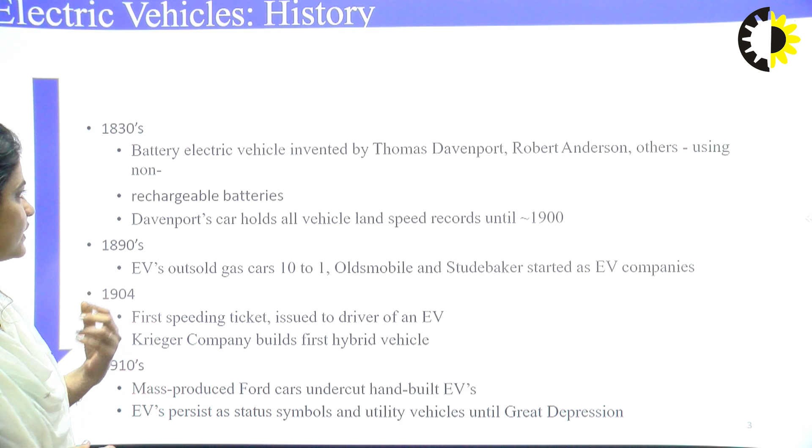So when did it start? Let's see the history of the EV. It started from the 1830s, like battery based electric vehicles invented by Thomas Davenport and Robert Anderson, that used non-rechargeable batteries. That's why it could not cover very large distances, and the technology of charging was not developed during those times. Davenport's car held all vehicle land speed records until 1900.

Then in the 1890s, EVs outsold gas cars, and some more companies also came up and started with electric vehicles.

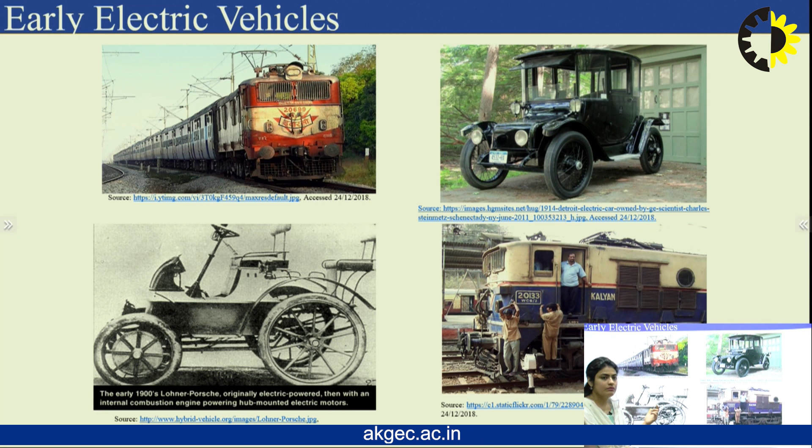So this is the vehicle which is based on the electric vehicle, built around 1914. And this is the first electric vehicle developed in the 1900s.

So looking at the timelines, the electric vehicle is not a new thing, but the demand for it is new.

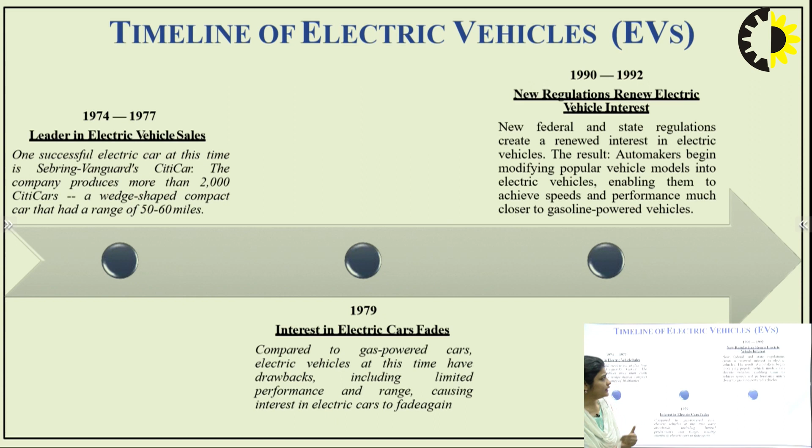Then with new regulations, renewed interest in electric vehicles was created. In 1990 to 1992, new federal and state regulations created renewed interest in electric vehicles. As a result, automakers began modifying popular vehicle models into electric vehicles, enabling them to achieve speeds and performance much closer to IC based or gasoline powered vehicles.

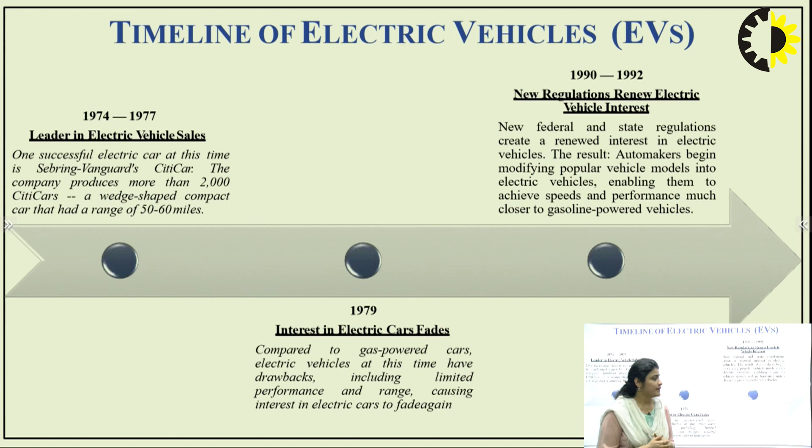Then in 1996, General Motors released the EV1, an electric vehicle that was designed and developed from the ground up, and the EV1 quickly gained a cult following.

Then in 1997, the first mass-produced hybrid vehicle was introduced by Toyota, and in 2000, Toyota released the Prius worldwide, and it became an instant success because it had better performance and speed range.

Then in the 1990s, building a better electric car, behind the scenes scientists and engineers worked to improve electric vehicles and their batteries, because in electric vehicles the battery is the major issue, how to manage this battery. So this is a major issue.

In 2006, Silicon Valley startup Tesla Motors takes on the electric vehicle, producing a luxury electric sports car with a range of 200 miles.

Then between 2013 and 2019, the Energy Department invests in a nationwide charging infrastructure, installing 18,000 residential, commercial and public chargers, including chargers installed by automakers and other private companies.

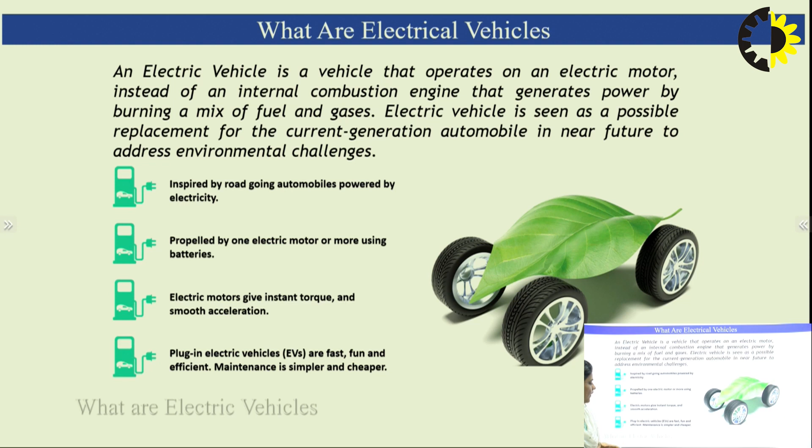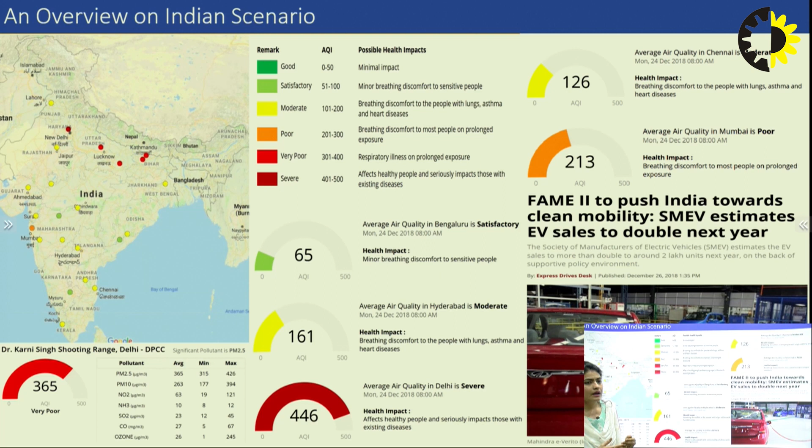So you can see that this air has a number of gases like carbon, because when the IC engine based combustion process is performed, a number of gases are released that pollute the environment and are also very harmful to people.

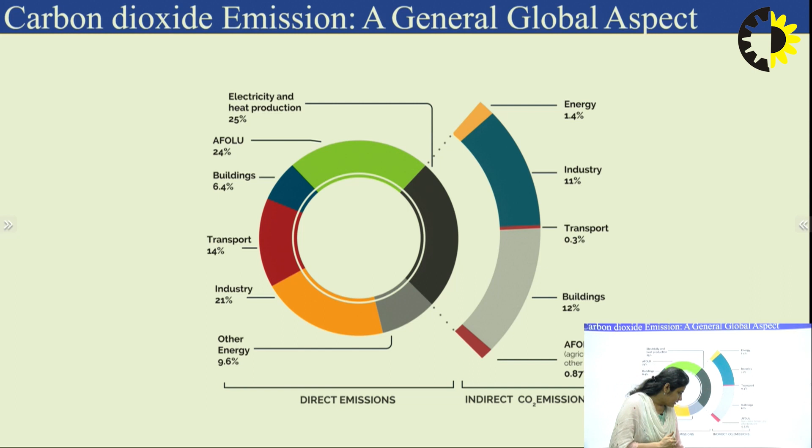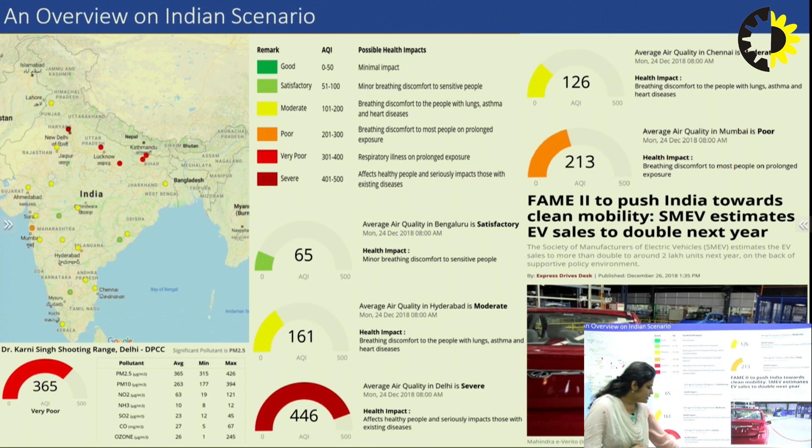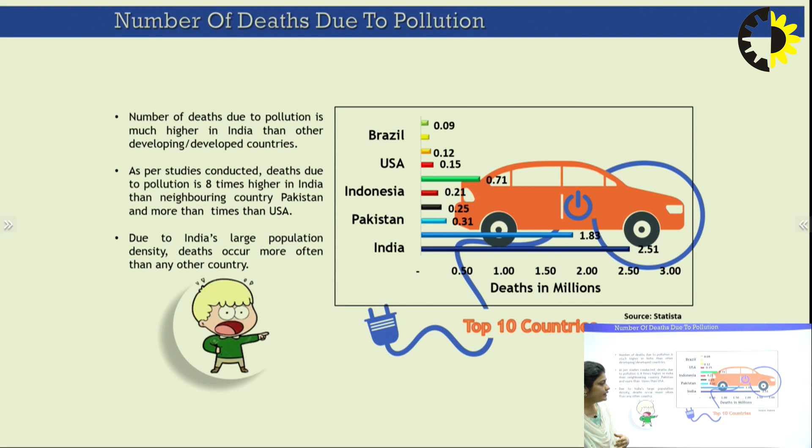So if you summarize these factors, why we go for electric and why we replace IC based vehicles with EVs - one big reason is that IC based vehicles emit carbon emission gases that pollute the air quality, so the air quality index becomes higher, the environment becomes polluted, and global warming happens. This affects human health also. This is a major concern.

Due to electric cars, it's zero emission. The electric car is run only by your motor. Purely electric car - so zero emission is possible when using EVs.

Then affordability - electric cars are less expensive to fuel and maintain. If you see the running cost, it's affordable in terms of maintenance, you can save a lot of money, because the one time investment cost is higher than IC based vehicles, but there is no fuel consumption. Every month there's no need to fill up the tank, so it's actually free of cost to maintain, and maintenance is easy. The running cost is very cheap, so anyone can afford it. Yes, first time investment is higher, but to maintain it for a longer time, in terms of cost and maintenance, it can be easy to maintain.

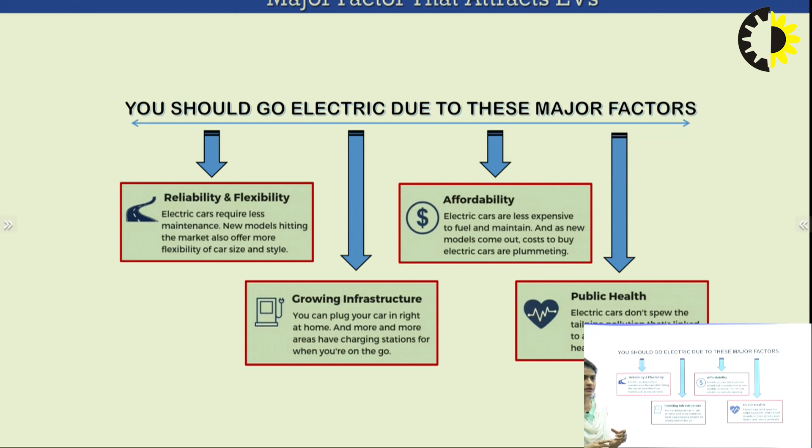Growing infrastructure - you can plug your car in right. To charge the battery, you can easily plug the car in your parking stations and parking area, or at home also, and more areas have charging stations for when you go.

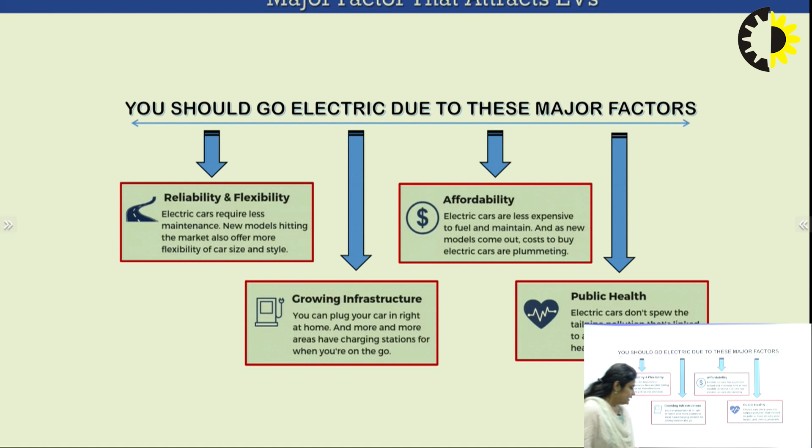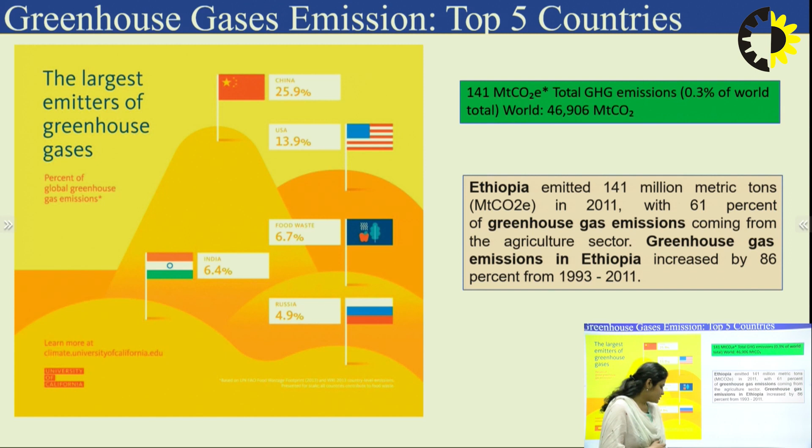If you see greenhouse gas emissions, India is one of the top countries, so you have to take care of that. If you see the emission gases in India, it's a 6.4% contribution to the environment. So it's a huge percentage. China is the highest at 25.9%, US is 13.9%, food waste is 6.7%, Russia is 4.9%, and India is 6.4%. So the greenhouse gas emission contribution by India is 6.4%.

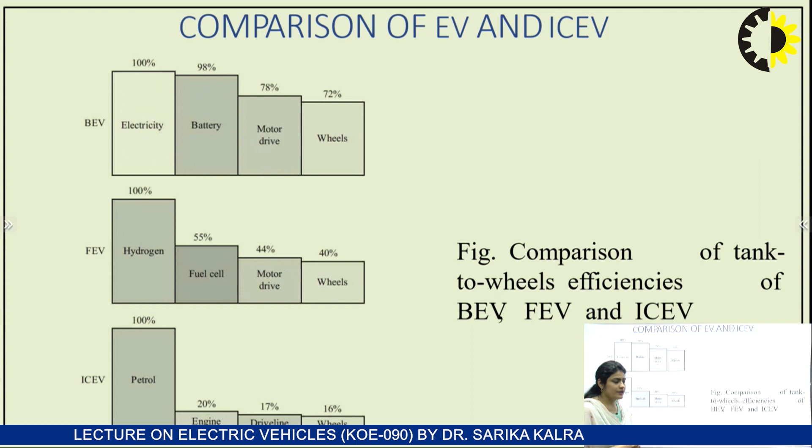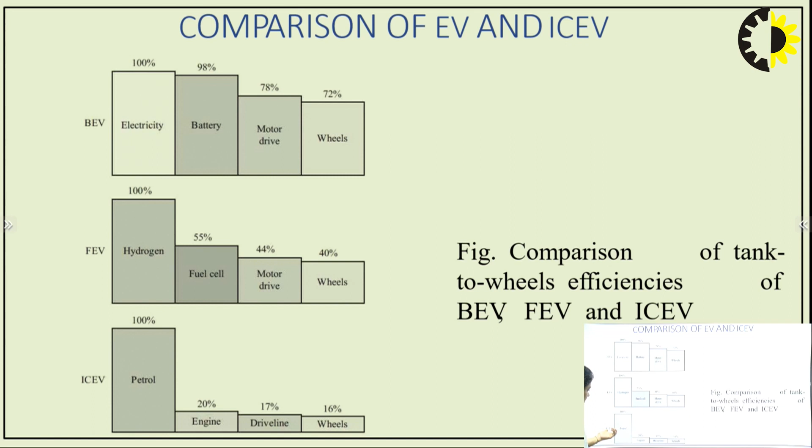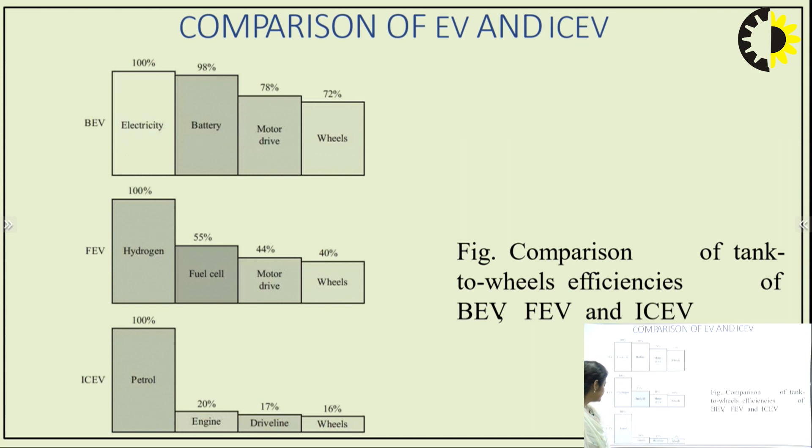If you see the fuel cell electric vehicle, it's 100% efficiency at input, and the flow of power and percentage power will be like this: till the fuel cell it goes to 55%, then through the motor drive, up to the wheel you are getting 40% efficiency. In the IC engine based vehicle it's 16%. So if we compare efficiency, the battery based electric vehicle is much higher than the fuel cell based electric vehicle and the IC engine based vehicle.

The first challenge is how much electricity quality should be given to the EV - the grid voltage, what voltage profile is given to the EV, that is a big challenge. And what criteria of electricity storage has been taken up, and what kind of battery raw material can be used for the battery. Because battery performance depends on how much time it takes to charge, how much time it takes to discharge, and in one charge how many kilometers it covers. So that matters, and that challenge has to be faced by the industry to make a better EV.

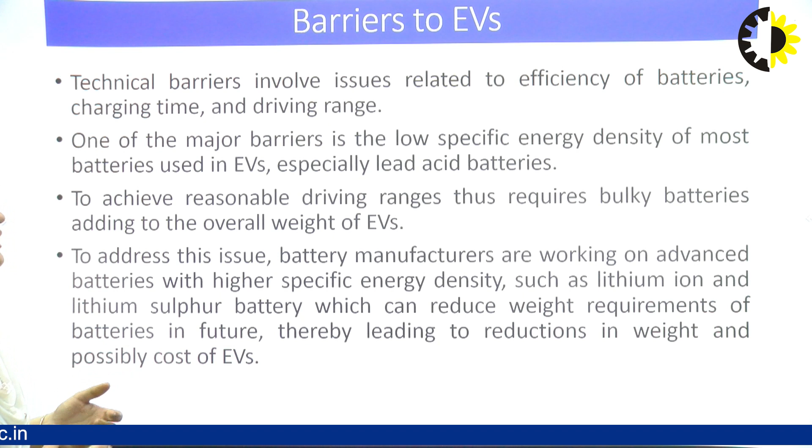If you see the barriers, as discussed earlier, technical barriers involve issues related to the efficiency of the batteries, charging time, and driving range. Driving range relates to speed range, because initially it requires small speed and higher torque, then it requires higher speed and lower torque - this has to be achieved with EVs.

One of the major barriers is low specific energy density for most batteries used in EVs, especially lead acid batteries, which have low energy density. So some challenges have to be taken to increase the energy density of the battery.

To achieve reasonable driving range requires bulky batteries, adding to the overall weight. If you increase the driving range or increase the rating of the motor, you have to increase the size of the battery, which increases the overall size of the EV. That is also a major challenge or barrier.

So battery manufacturers are working on advanced batteries with higher specific energy density, such as lithium ion. Research has been done, and lithium ion batteries have higher energy density, so they can be used at a lower size. Overall size can be reduced with lithium ion, and the speed range rating can be increased.

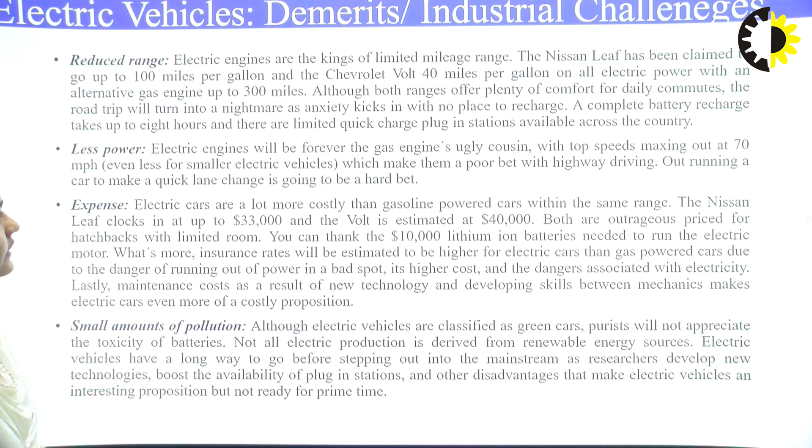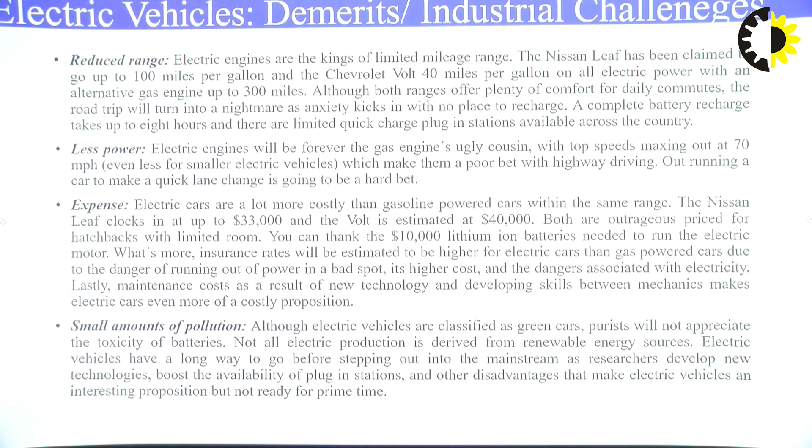So, electric vehicles - these are some challenges, again the same things discussed because it's very important. These are the key points to consider: reduced range, electric engines are the kings of limited mileage range, less power, the electric engine will follow the gas engine, top speed maximum of around 70, and it's expensive.

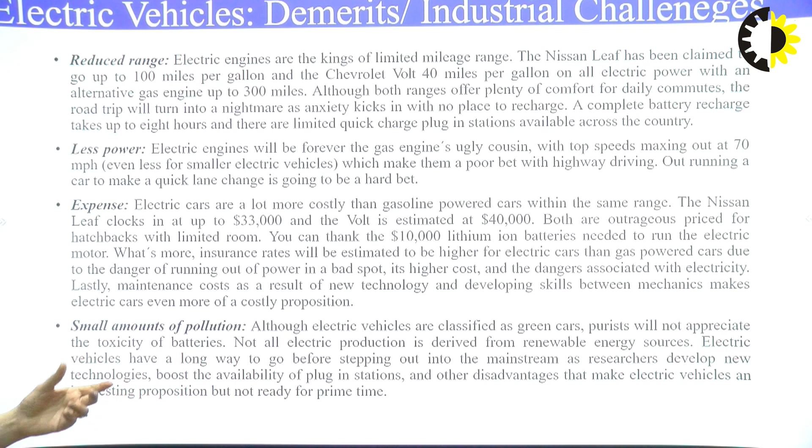And a small amount of pollution - classified as green cars. Using EVs can reduce pollution, zero emission can take place.

Initially the cost is high, but if you see the running cost, it can be reduced because it's easy to maintain - no again and again refilling of petrol is required. Also the power density rating can be increased, so if you increase the power density, the size of the motor and battery can be reduced. These are the benefits of electric vehicles.

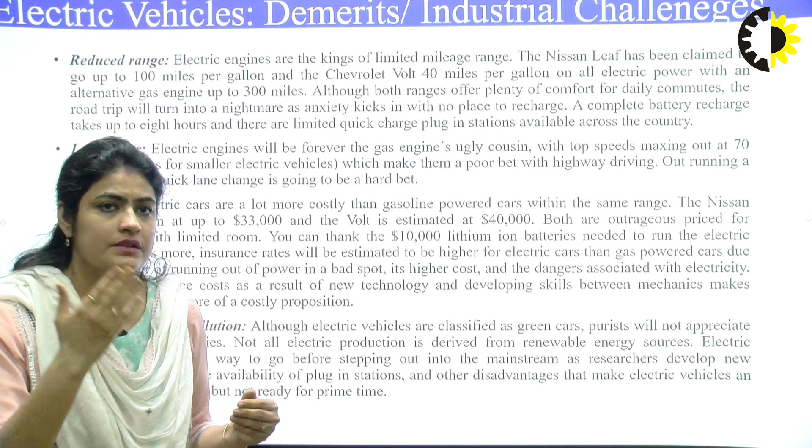We can also increase the range of speed. So this is all about what challenges we have to take care of with electric vehicles, and the history behind this - where the electric vehicle comes from. It started in the 1980s and came up in 1997, 2000, and the research has been going on since.

So in the next lecture, we'll see the architecture of the EV, and then we'll see what kind of motor we are using. Today's lecture will stop here. Thank you.